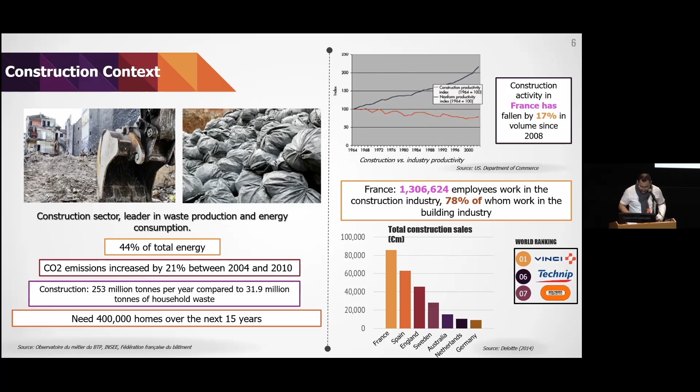Another specificity of France is the total construction sales; France is one of the leaders in this field, with companies well known in the world: Vinci, Bouygues, Technip, and so on. In Europe, France, Spain, and England are leading in this construction sector.

So the two words I'd like to highlight, to be efficient, are important for the future in France: decarbonation, the first word, and renovation, the second. Decarbonation and renovation guide all the work that we are doing, with a lot of laws and regulations for energy and environment based on these two principles.

So we have what we call RE 2020, and we also have RE 2050, which are the rules that impose this view on us.

I choose to speak about one of the leaders of architecture, Le Corbusier, a French-Swiss architect whose real name is Charles-Édouard. You can find many interesting YouTube videos of him. He said, many years ago, that big industry is taking over the building industry, which is extremely important. Now we are in this area of the link between industry and construction.

We can see here, in 1950, one popular magazine speaking about modular construction—though at the time we didn't call it that, we called it prefabrication. I hope we all understand that there is a big difference between prefabrication and modular construction, which is very important. Some people use the term off-site construction, but I prefer modular construction.

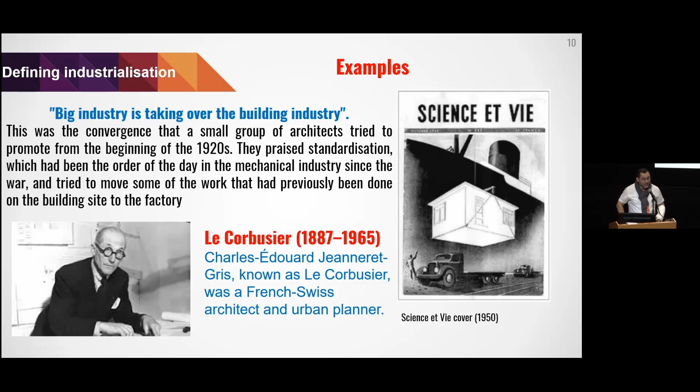So the history of prefabrication and modular construction, and the impact of robotization and these new challenges linked to environment and carbon, are extremely important and are changing the world.

So what does Industry 4.0 mean from an academic point of view? 4.0 follows 1.0, 2.0, and 3.0. It is a revolution: the first industrial revolution, the second industrial revolution, the third industrial revolution, and now the fourth one, which we are in.

When we say revolution, it means we forgot all the past and began new things. All these industrial revolutions are usually linked to energy: we discovered coal, we discovered electricity, and now we are working more and more on industrializing fusion—not fission.

So I don't believe there will be an Industry 5.0, 6.0, or 7.0 in that sense. It is really linked to discovering a new energy source, and the new energy we're working on now is fusion.

The latest results came from ITER in France, a world lab, where we moved from theory to lab demonstration—about 3 to 5 minutes of possibility achieved in the lab.

All the scientists think that it will be in 2060 or 2070 that we can discover fusion. Fusion is different than fission. Fission is nuclear: you have two atoms, or one atom, and you cut the atom. That's fission. Fusion is the opposite: you have two atoms, and you make contact between them, and this is fusion.

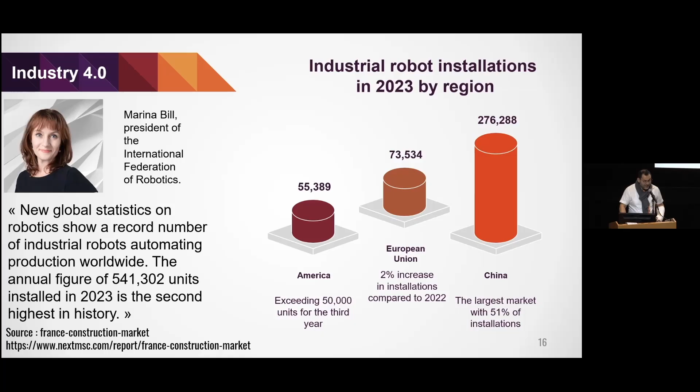It is linked to their strategy of Industry 4.0. The latest report we can find, industrial robot installations in 2023, shows a comparison between regions - China is really increasing this. The European Union shows good increase. America is less than Europe. We can see the ranks here, and Marina Bill, president of the International Federation of Robotics - you can find this data, which is important because robotization is linked to strategy, to innovation, and also to what will happen in the future.

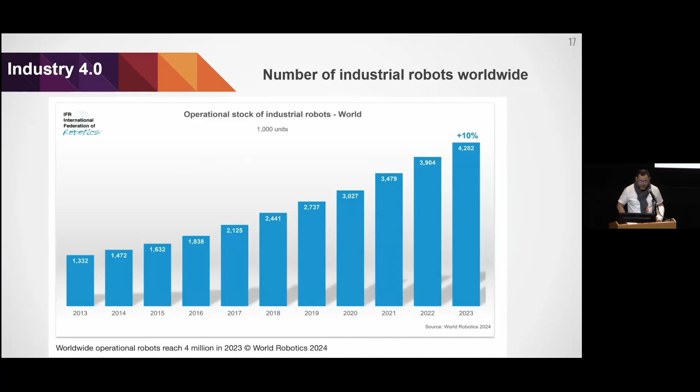If you really look at this strategy, you can understand a lot about the future of each country, where they want to go, the culture of the country, its weaknesses, its strongest strengths, and the culture and history, which is very important.

We cannot copy Industry 4.0 for any country because we don't have the same culture, we don't have the same history. Germany is different from France. France is different from Belgium, even though we both speak French. This is very important to understand.

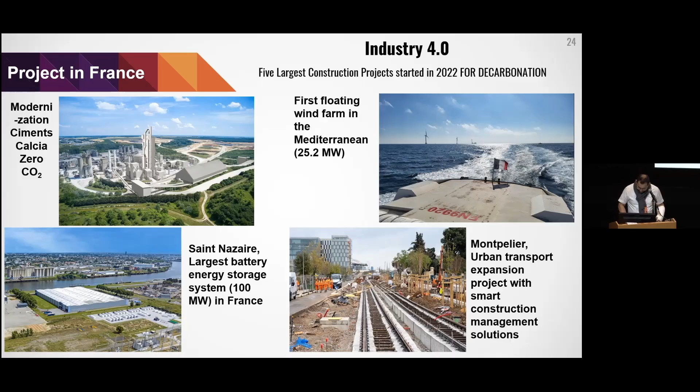First floating wind farm in the Mediterranean. Montpellier urban transport expansion project with smart construction management solutions. Saint-Nazaire's largest battery energy storage system. And modernization of Ciments Calcia toward zero CO2. This is one of the big project parts in France linked to decarbonization, and this is the showcase of the country.

In our mind in France, in my lab, in our region, we think we will face another COVID. So we are working on how to reduce time to work and be performant. We work under the hypothesis that there will be another COVID. This is really important.

For example, offsite construction is structured to reach 50% of the market by 2031. The culture of offsite in France is really new - something changed the mentality, something changed the behavior. We are not in North America, so this is new, but we are working more and more on modular construction in France, and the state is helping us with that.

As an example of renovation, we use robotization, digital twins, and many other things - the Notre Dame de Paris example. Look at 2006 and 2013, before the renovation, before the problem we faced.

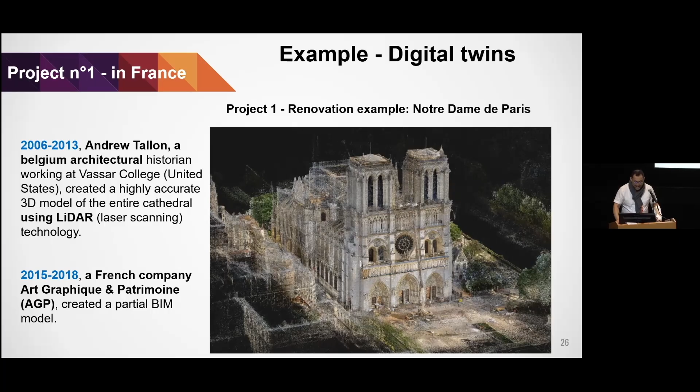Between 2015 and 2018, a French company, Art Graphique et Patrimoine (AGP), created a partial BIM model. Thanks to that, the renovation was done. This is one of the things we can be proud of.

Renovation example, Notre Dame: the virtual twin project led by the CNRS, the Ministry of Culture, the Public Restoration Establishment, and the system included collaborative workshops. Collaborative workshop means that now, in mega projects or new projects, we cannot rely on technology as the solution alone.

We need collaboration, a method of collaboration working. It's not only technology—anyone can master technology, but technology is usually changing. What we need now, more than technology, is the collaboration method. There are many collaboration methods: IPD, AWP, TVD, and a lot of others which exist in the market, and we are working on it.

These workshops were held at the Cité de l'Architecture et du Patrimoine, welcoming students from engineering and architecture programs, among others.

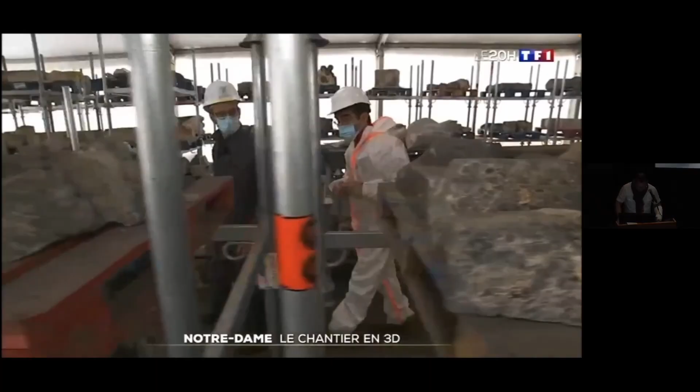Virtual Notre Dame, reconstructed here from a cloud of billions of points captured by a scanner. A 3D model created before the fire is proving very useful today. In total, nearly 3,000 pieces considered relics have been collected, cleaned, and cataloged. To assist with the assessment, all the voussoirs are digitized.

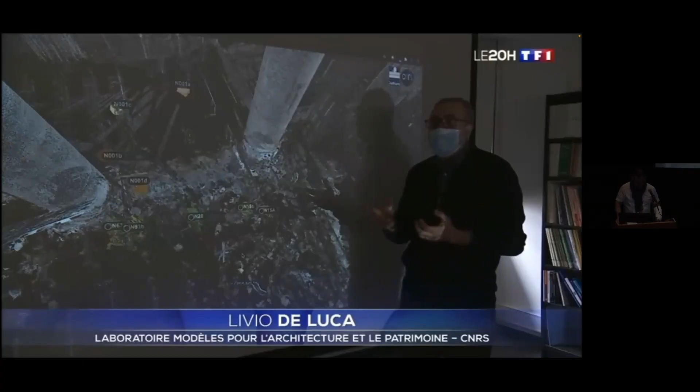They had to develop a robot to scan them and meet the needs of archaeologists, historians, and architects. On the digital skeleton of Notre Dame, in the hole caused by the collapse of the spire, the arch of the missing vault and the voussoirs are recreated here in gray. By analyzing tens of thousands of images, they were able to spot voussoirs in the debris.

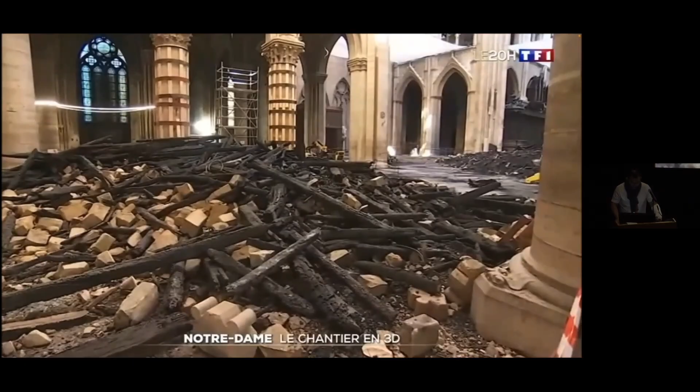Researchers from the CNRS conducted an investigation parallel to the archaeologists' excavation on the ground, in the debris that littered the floor before it was cleared away, just as we had filmed it, still in place and scattered a month after the fire. The idea is to study the trajectory of the falling voussoirs, like this one. Knowing the spot where each voussoir fell will make it easier to determine its exact position on the arch. It's an unprecedented opportunity to enrich the knowledge produced by scientists interested in heritage.

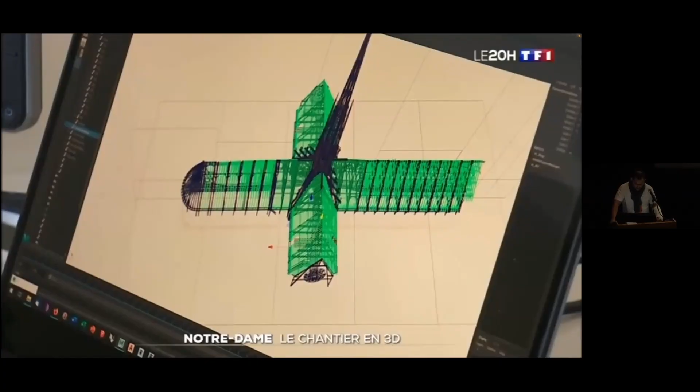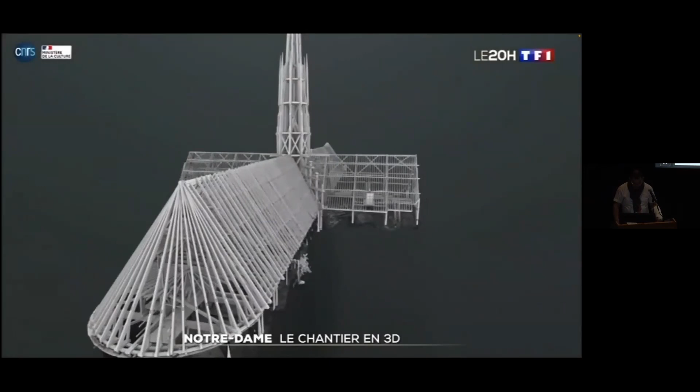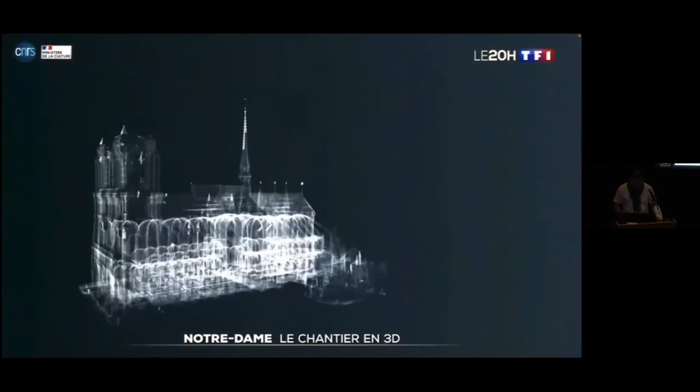At Notre Dame, it's a return to the future. In the limbo of algorithms, the logic of software, it's coming back stronger than ever. Its rebirth is not a fantasy.

This project really is extremely important. It is a source of knowledge, a source of science—more than 100 scientific articles. It's really interesting to look into that and understand what happened. And the results are public, which is really, really important—technology and collaborative work which was done for that.

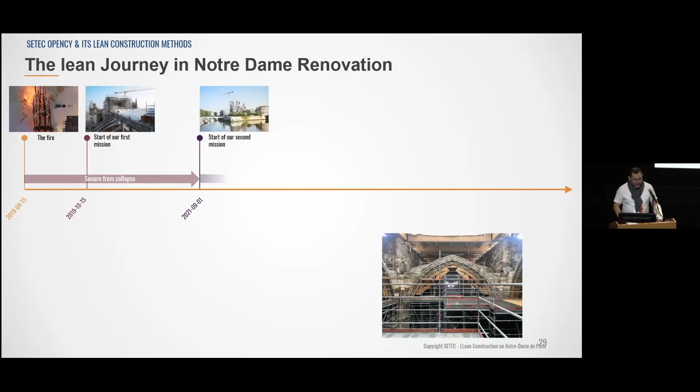So, very quickly, the lean journey in the Notre Dame renovation: because we used lean construction management, some methods for that. You have the fire, the start of the first mission, the start of the second mission, and the rooster is back, and the reopening of the cathedral, which was done on time and within budget. We used many new technologies—digital twin, robotization, laser—and also collaborative methods to achieve that.

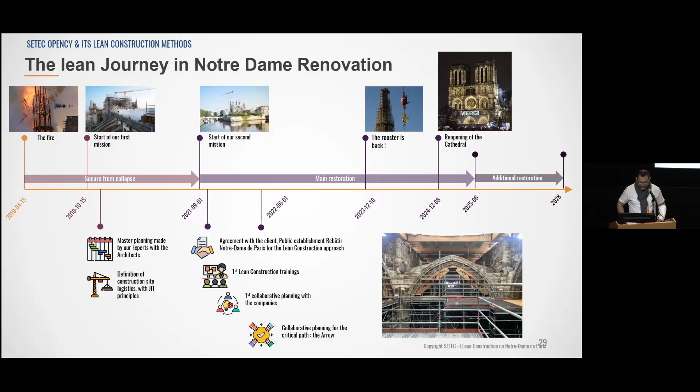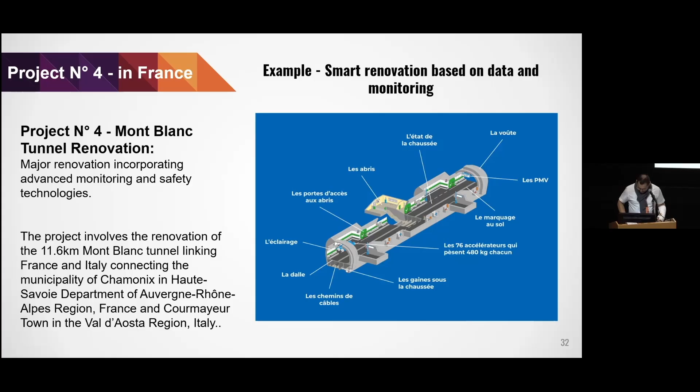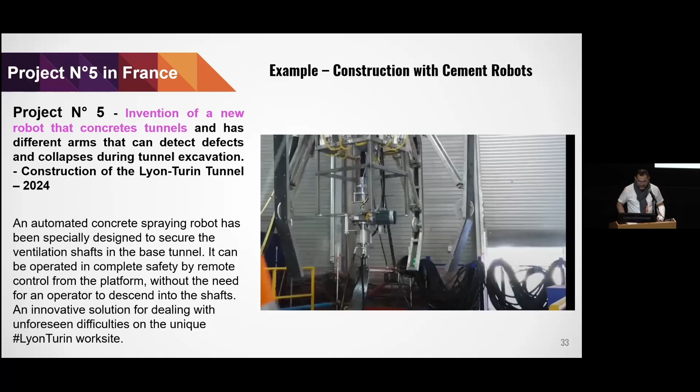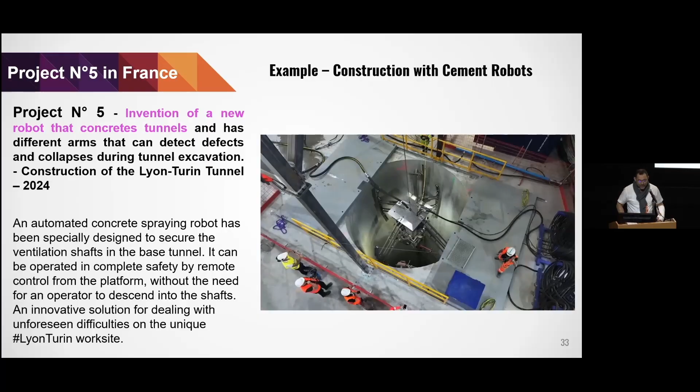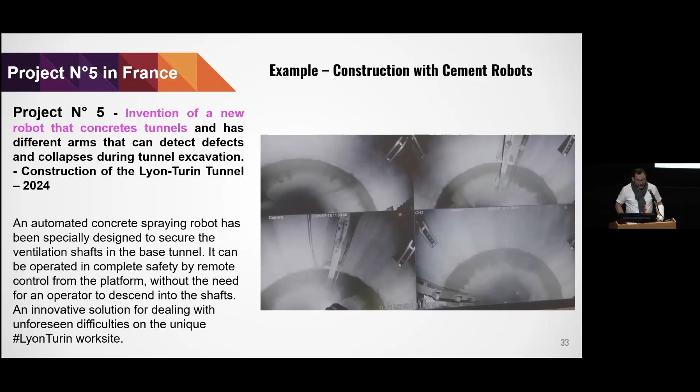They designed and created a new robot specially for that, mastering technology and creativity in renovation, which is really important - a major renovation incorporating advanced monitoring and safety technology. There is an invention of a new robot that concretes tunnels. Look at this robot. It has a lot of arms because the ground was not very good. The automated concrete spraying robot has been especially designed to secure the ventilation shafts in the base tunnel. It can operate in complete safety by remote control from the platform, without the need for an operator to descend into the shafts - an innovative solution for dealing with unforeseen difficulties on the unique Lyon-Turin work site. So robotization has a lot of future in the construction sector, because there is a lot of things we are doing on it.

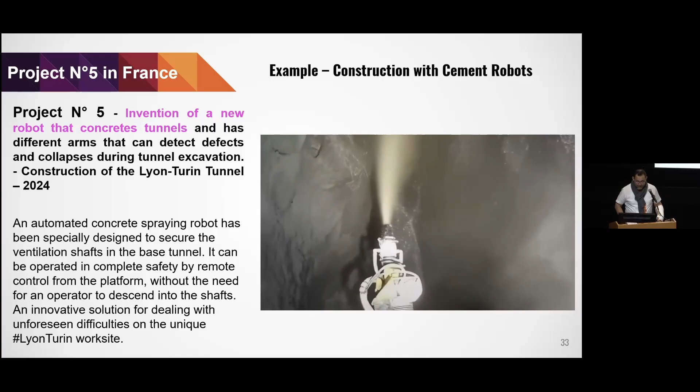Mega projects now in France - I spoke about some of those projects. You know that the nuclear and thermal production division in France is one of the leaders. France has 56 pressurized water reactors, most of which have been in service for over 40 years.

We are in Lille. Centrale Lille is located in Lille, one hour from Paris by high-speed train, 30 minutes from Brussels by high-speed train, and 1 hour 20 minutes from London by high-speed train under the channel. And the biggest nuclear factory in Europe is near Lille.

And there is a lot of work on this renovation of the nuclear factory - approximately 36 facilities, power plants, factories. Research, funding and the strategic plan France 2030 dedicate more than 1 billion to SMR, and 500 million for nuclear R&D also. A lot of work - we are working on the future of mega projects in nuclear factories. When you say nuclear factory, you say there are 3,000 or 5,000 people working on it, so there are new cities near the nuclear factory, with housing, management, and a lot of things changing. We are very, very happy that Centrale Lille is involved in this kind of project, thanks to engineering research, but also thanks to the proximity of that.

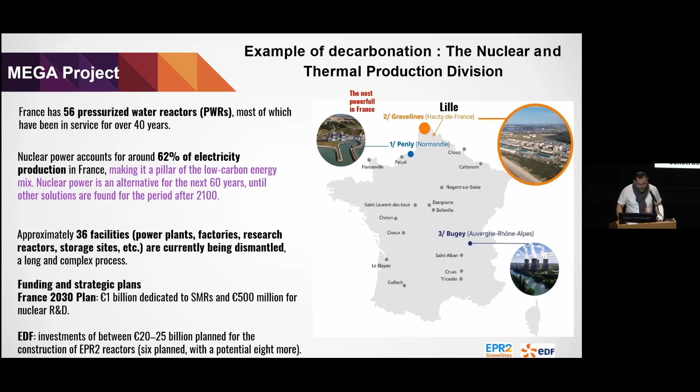SMR is something you have to know a bit about. EDF's investment of between 20 to 25 billion euros for the construction of the EPR2 reactor is prepared for the future. This mega project involves digital twin, digitalization and data management, lean construction philosophy with advanced work packaging. There are specialists on that - offsite construction inclusion, alliance with stakeholders, IPD, joint contract, public-private approach, training for the new generation. We don't need only technology, we need collaborative methods for this mega project. We need training of the people working on that - a lot of need for training because these mega projects are extremely important. So we are working on this mega project until 2050.

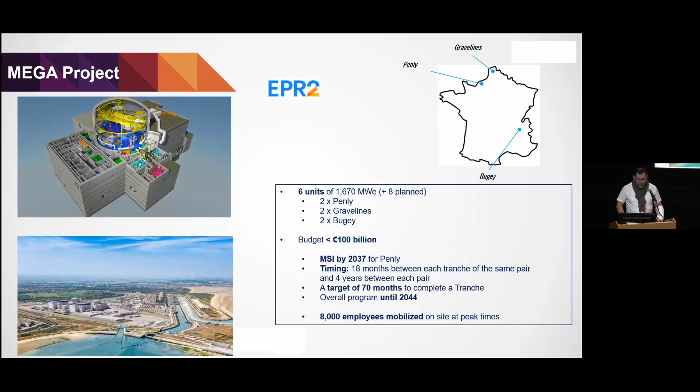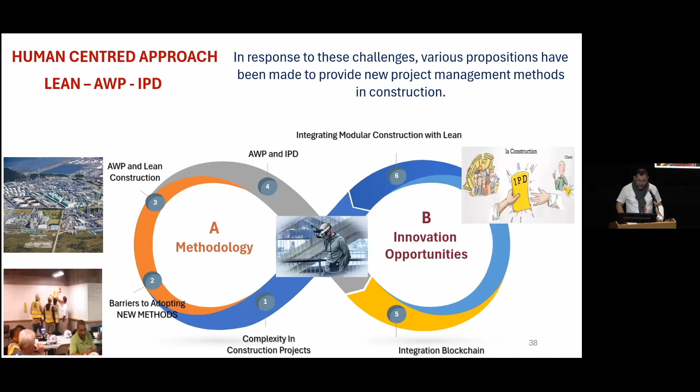EPR2, this is another example to give you some idea about that. And as I stress, technology and collaborative methods are very important to master for our engineers, our researchers, and also our work with our industrial partners - the Lille Lab Industrial Research.

We work on 3 axes: robotization and automation of construction, axis 2 IPD and AWP lean construction, and axis 3 - blockchain and metaverse. These 3 axes work together at the same time. Robotization doesn't work without any collaborative method, and this is really important - this multidimensional, multidisciplinary approach happening at the same time in the team. This is very important, it is the DNA also of Centrale.

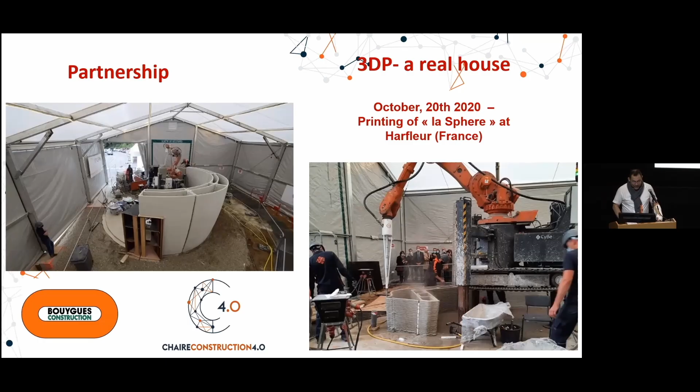Example in my lab: 3D printing. We do it in the lab, but we do it with Bouygues Construction. We helped them print a house. It was done even during COVID, as you see, in 2020. So we are working from TRL 1 to TRL 9.

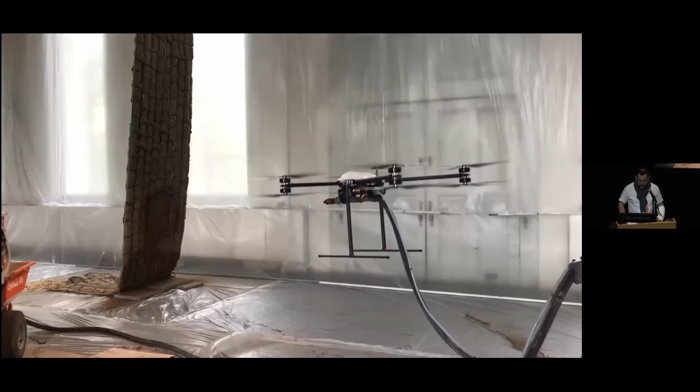The idea came from the laboratory, and together with our partner—we work with another company, a Spanish company, on making 3D printing with drones. We're making a lot of things with the drones. We have our drones, we did that, we are very proud about that. Even the PhD student, he is now a doctor, he's in this room.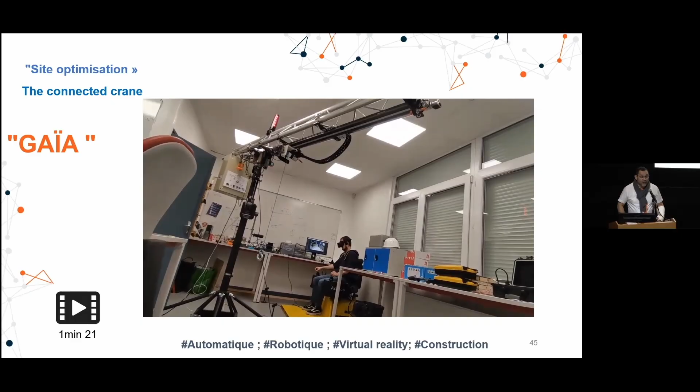So from TRL 1 to TRL 9, we monitor a crane with real virtual reality. This work was done in my lab, and we did the industrialization up to TRL 9 on the construction site, so it was used for that. Really, this is very interesting, this collaboration between companies and our lab.

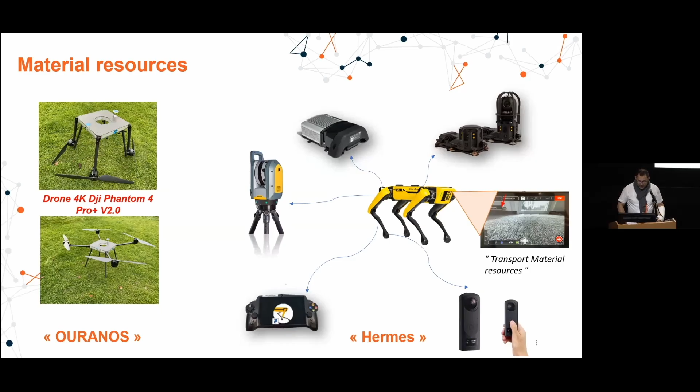We have, since 2019, this kind of robots, drones, and more with energy. So we design a robot to make digitalization, any digitalization, and to scan the energy of any buildings. But we will go further for the impact on environment, following the rules of France in this area.

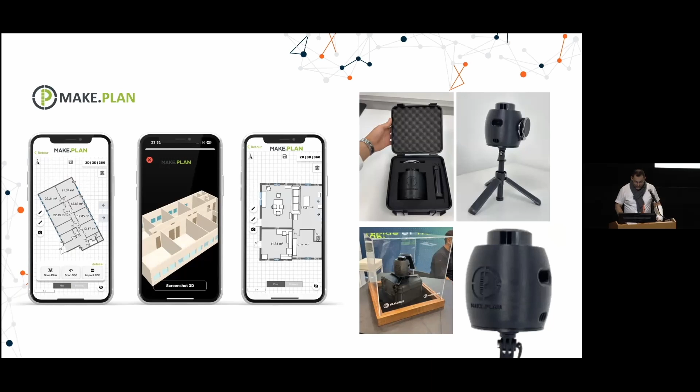This is the scan. We have the robot, we have the software and the hardware, and this is the video. Please, the video.

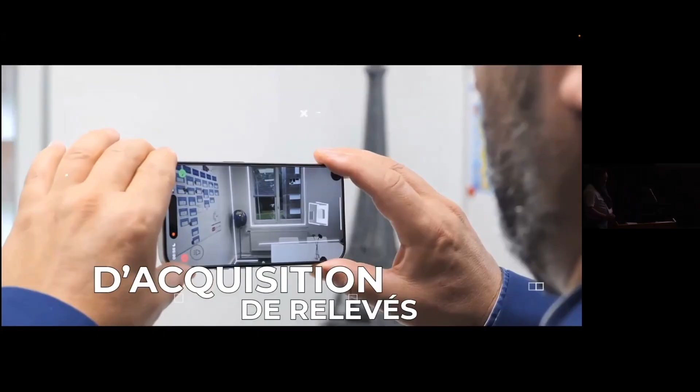This is my PhD student. This is me scanning my lab. In 2 minutes, the building was scanned. This is one of our friends.

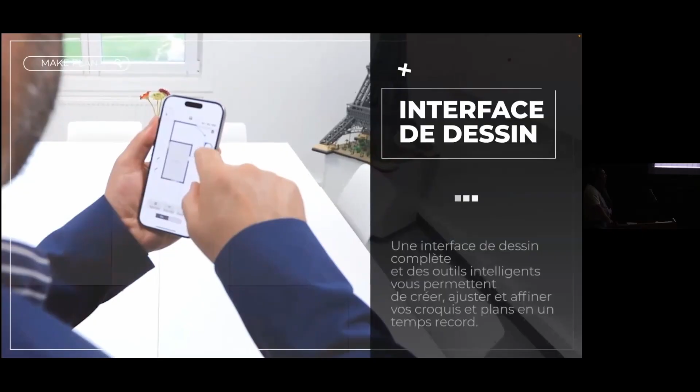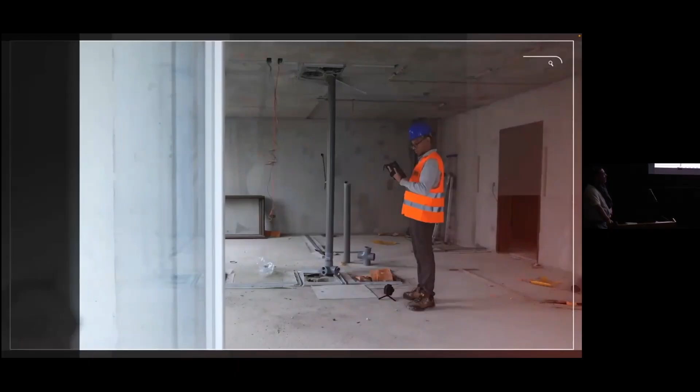We can use it also on the construction site. So look at the video—the person has the plan of their building in 2 minutes. Then there is a software linked to it, and we can determine the energy consumption of their buildings under French law. So it can be rated A, B, C, E, or F.

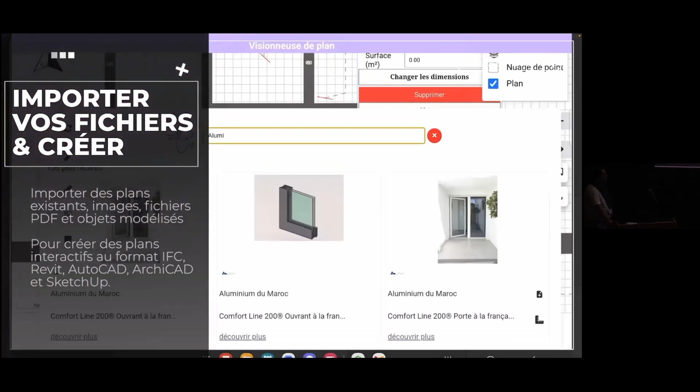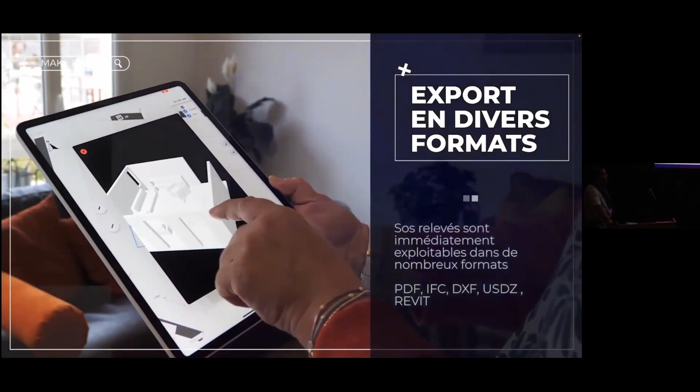And this tool of digitalization, which is now ready, gives us a lot of ideas to work on energy, on environment, on the quality of the air. And it really changed things. So we can make geolocalization at the same time. This is the new field that we are working on.

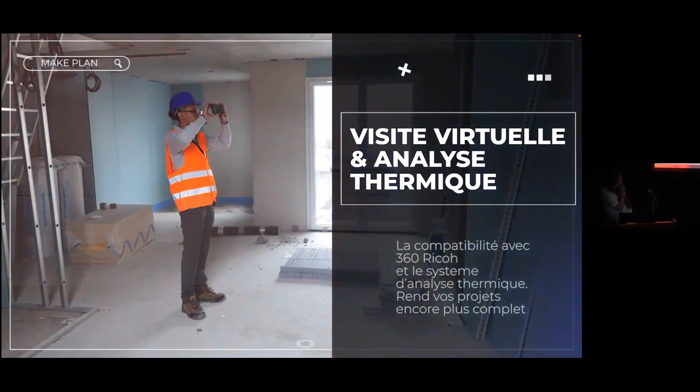So we did some work on blockchain, really interesting work. We didn't put it into industrial action yet, but it will be.

And this is my team, and I will finish with that—a presentation of my team.

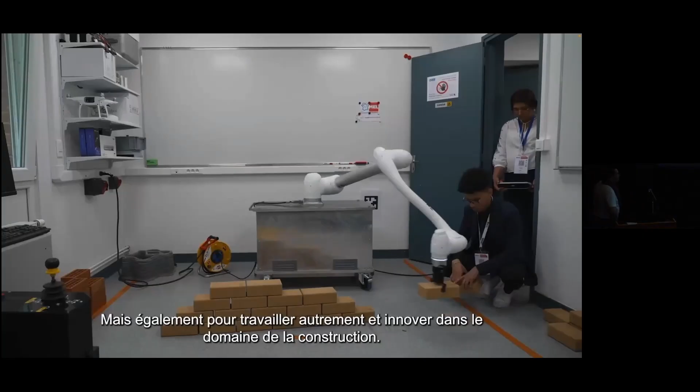Centrale Lille's mission is both education and research. We train our engineers and doctoral students in the skills of tomorrow, focusing not only on industrialization and robotics, but also on new ways of working and innovating in the construction sector.

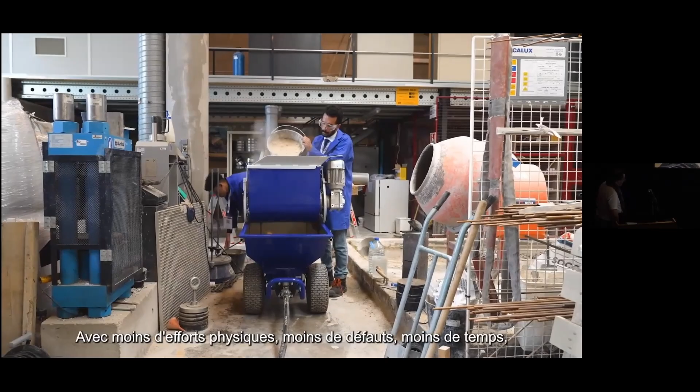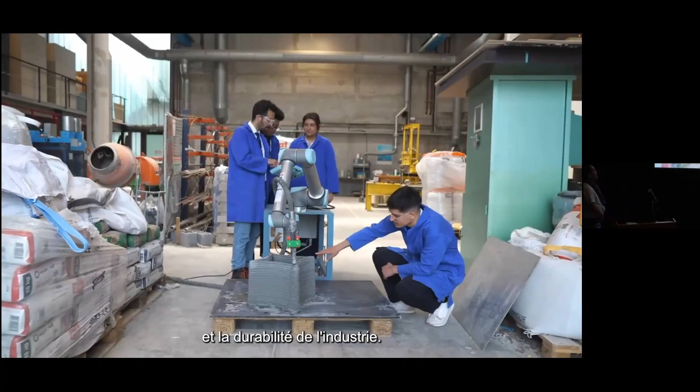My thesis is being carried out as part of a partnership between Centrale Lille and Briqueterie du Nord. The main objective of my thesis topic is to reduce the energy consumption and carbon footprint of the brick manufacturing process and to improve operational performance by applying new technologies and methods inspired by Industry 4.0.

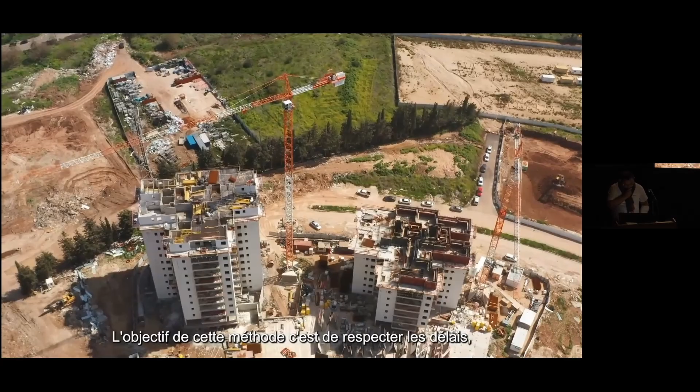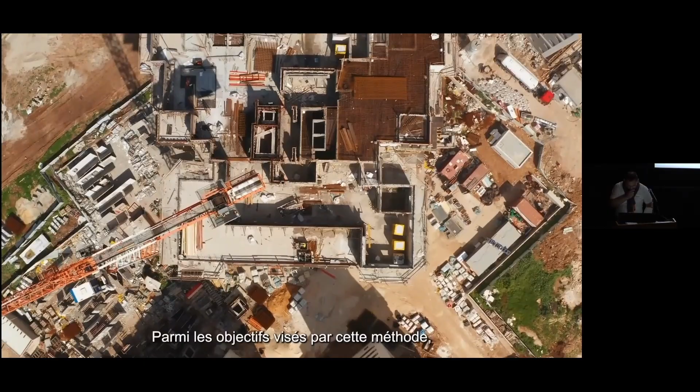I am working on the AWP method, a project management approach for complex construction projects. The goal of this method is to meet deadlines, reduce costs, improve on-site productivity, and prevent accidents on construction sites. Among the objectives we aim for with this method is to implement it within a French or even European industrial ecosystem, and the second objective is to adapt this method to residential and commercial construction.